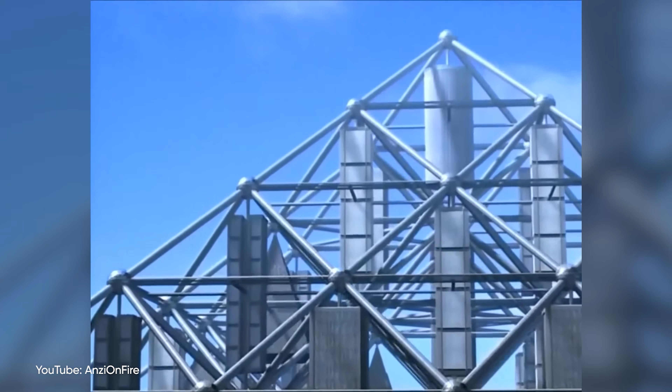A big iconic skyline is something every major city is proud of. But what if some cities take it a little bit too far and want something higher and bigger than ever before? Will it work out, and even more importantly, will there be enough money for it?

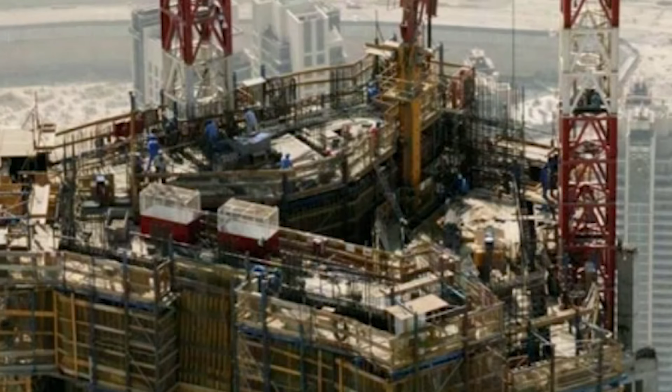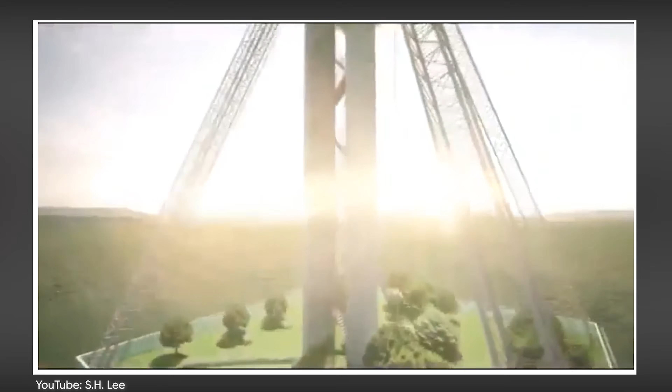Number 5: Sky City 1000, Tokyo, Japan. Since its inception in 1989 by the Takenaka Corporation, the iconic Sky City 1000 has been featured in several publications. Its popularity has grown over the last decade, and it has even been featured in various documentaries throughout the world, including a handful on the Science Discovery Channel, where I first learned about it in 2003.

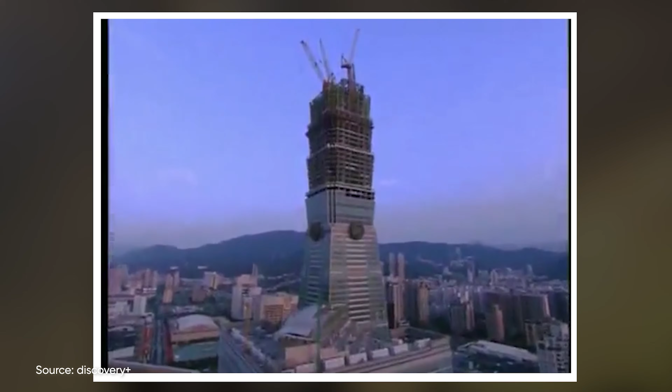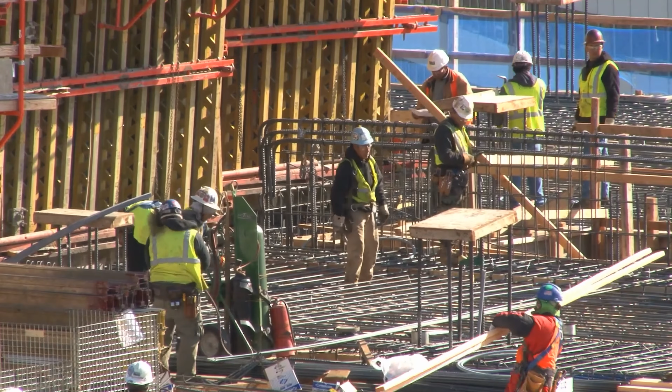Sky City 1000 was envisioned as the next step in urban evolution, with a mega skyscraper that would dwarf anything that we have now. This indicates that its huge building, which included malls, food courts, parks, and rec centers, could have housed nearly 160,000 people.

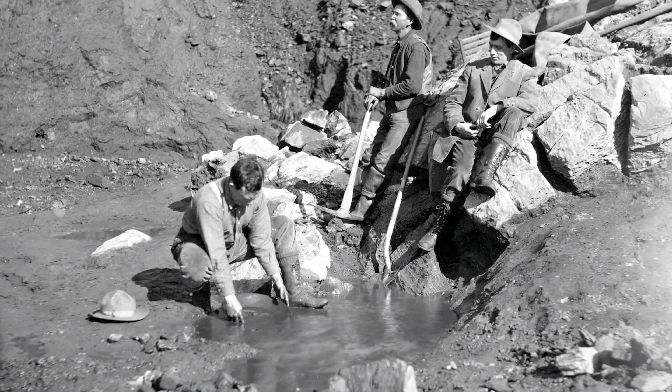Why was this initiative suggested in the first place? Sky City 1000 was conceived during a time when Japan's economy was flourishing like a gold rush, and population was exploding. The growth in population increased the scarcity of land, which meant it would become more expensive to possess. With this in mind, businesses spend a lot of money only on land, but a project like Sky City 1000 would have significantly reduced this expense.

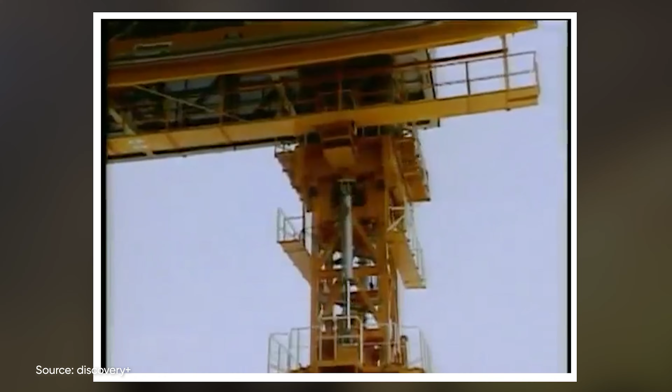Sky City 1000 would have been replicated twice more and then linked together to create something only seen in a science fiction film set in the 21st century. Now, I realize it appears silly and was most likely designed by a lunatic, but I tell you that this project was taken very seriously for a long period of time.

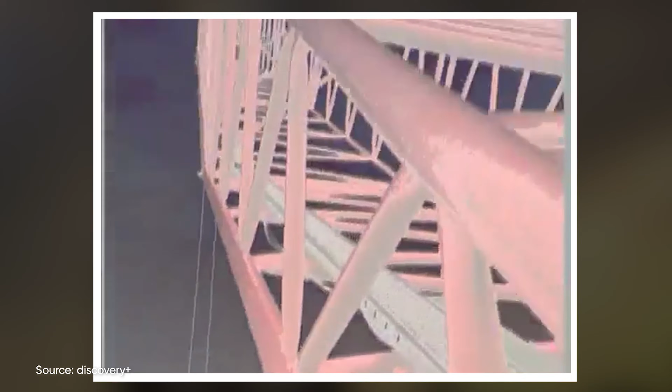However, there were numerous issues with this project. The first issue is the amount of resources required to develop it. Due to the sheer size of the monolith, it would require cutting-edge materials to keep it upright, and in order to manufacture enough materials, it would have to push smelting businesses to their limits for many decades to come, with some estimating that it may take up to 80 years to produce.

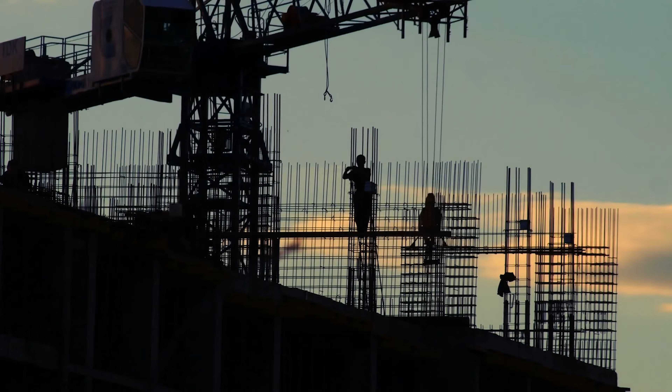The second issue is deciding where to put it. The suggested Tokyo location is required due to the scale of the building. The predicted cost is in the billions, but this is totally dependent on emerging technology and the politics around it. While Japan is currently doing well in this economy, it is hardly ideal.

Number 4: Millennium Challenge Tower, Kuwait City, Kuwait. So what if we could take whole deserts and transform them into green, fertile land?

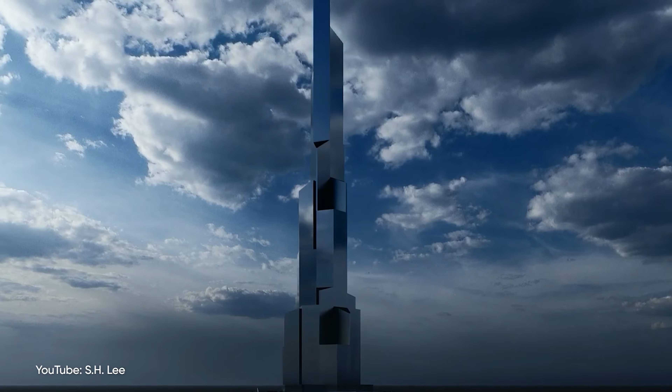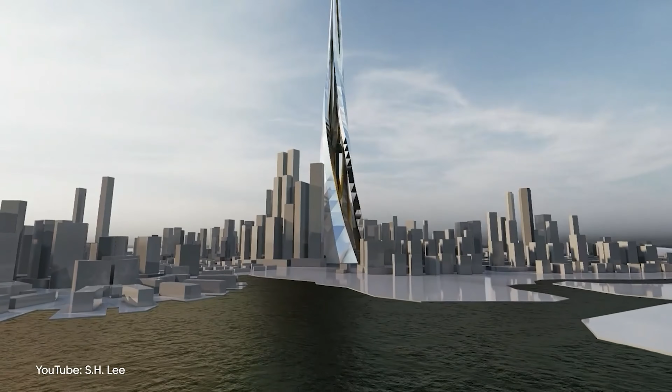Next up on our list, a vertical city in which the water used will serve to make fertile 25 square kilometers of desert, making it live by precious trees, capable in their turn to provide oxygen to the fortunate inhabitants, binding in an indissoluble and reciprocal way their destiny on this planet. A building that is not to be constructed but that grows following constructive techniques never supposed until now, capable of rising and unfolding itself section by section as a very logical flower.

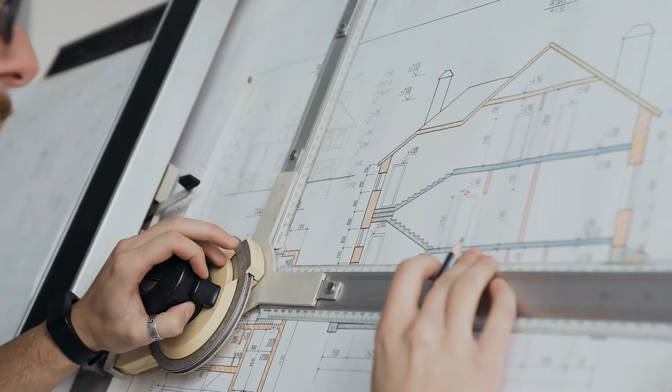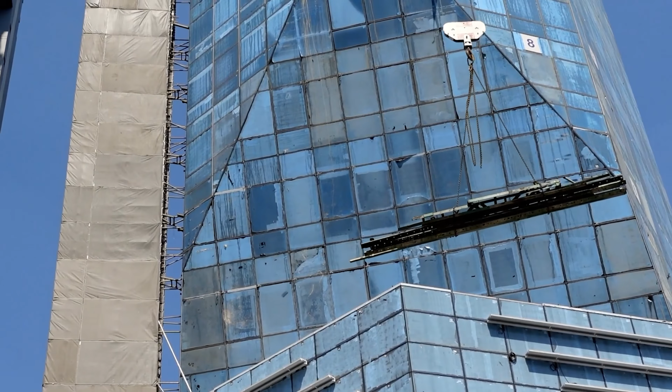Contextually, with the building project, there will be the project for the entire and sustainable maintenance, the demonstration of the updating routine of both the distributive layouts and the finishes of the installation as well as of the structural sections. And besides the demonstration that it can stand upright, the certification that it may nourish itself drawing on the sun, the wind, the rain, on its inhabitants' use, and all of that has been used in the construction may be returned in the form of reusable raw materials for future generations.

The Millennium Challenge Tower is a super tall skyscraper designed by architect Omero Marchetti as part of his proposed Ethics City concept. The aims of the project are to reach a nautical mile in height. If built, the tower would reach 6,076 feet.

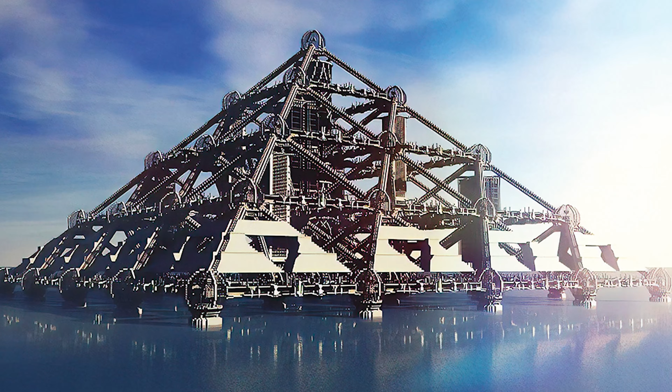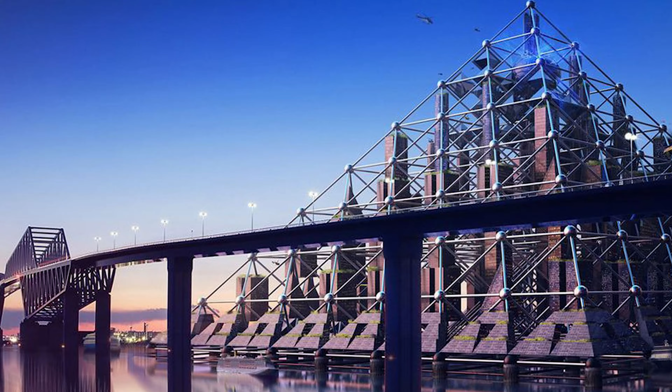Number 3: Shimizu Megacity Pyramid, Tokyo Bay, Japan. The Shimizu Try 2004 Megacity Pyramid is a proposed Shimizu Corporation project for the construction of a massive self-sustaining arcology pyramid over Tokyo Bay in Japan that would have businesses, parks, and other services all contained within the building.

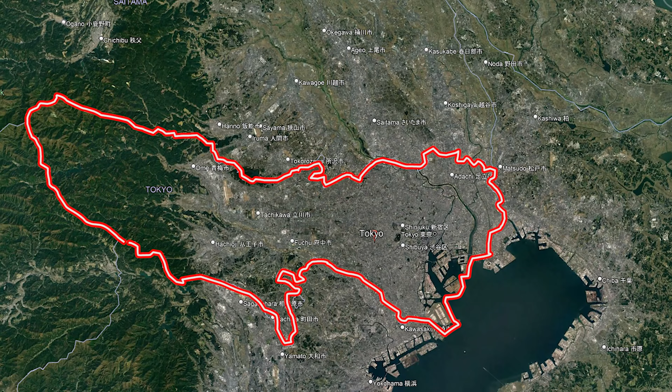The structure would house 1 million people. The structure would be 6,575 feet high, including 5 stacked trusses, each with similar dimensions to that of the Great Pyramid of Giza. This pyramid would help answer Tokyo's increasing lack of space, although the project would only handle a small fraction of the population of the greater Tokyo area. The proposed structure is so large that it could not be built with current conventional materials due to their weight.

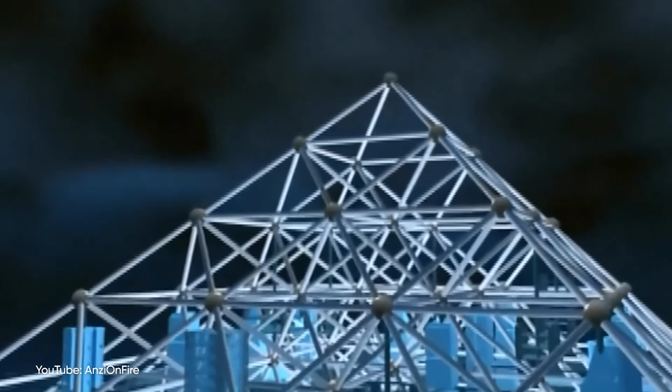The design relies on the future availability of super strong lightweight materials based on carbon nanotubes and graphene, presently being researched. The plan was to start construction in 2030, but no further action has been taken.

Shimizu is still determined to complete the project, and if built, it would make history as the largest man-made structure in world history. Tokyo has been having issues regarding overpopulation due to internal migration, among other causes.

The Shimizu Corporation, located in Tokyo since the Edo period, witnessed it firsthand. They had an idea for a solution that was different from other proposed ideas.

It started in 1982, when one of the employees went to see Blade Runner and saw the opening scene showing the two pyramids the Tyrell Corporation operated from. The architectural marvel amazed the engineer, who told his colleagues about it the following day, leading to the idea for the megacity pyramid. Ten years later, in October 1992, representatives traveled to patent offices the world over to patent their idea internationally.

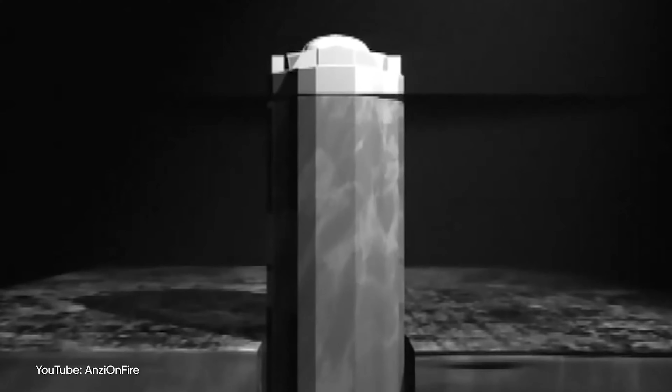The pyramid's foundation would be formed by 36 piers made of special concrete. Robotic systems are planned to play a major part in both construction and building maintenance.

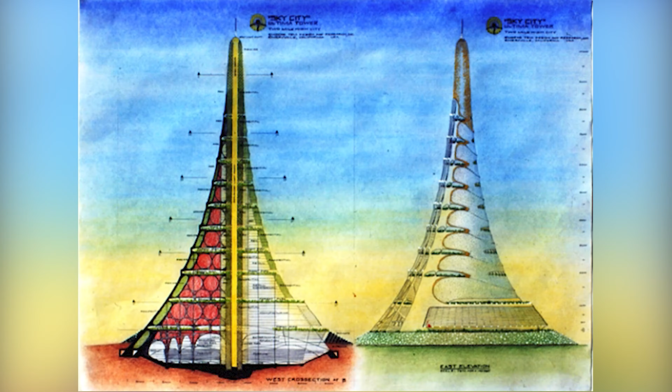Number 2, Ultima Tower, San Francisco, US. The Ultima Tower was a hypothetical super tall skyscraper designed by American architect Eugene Tsui in 1991. It was envisioned to be built in San Francisco, California, and could accommodate up to 1 million people. With a total height of 10,558 feet, the tower would be 2 miles tall and comprise 500 stories if built.

It is one of the tallest man-made structures ever conceived, but will not be built. It was never built because the idea was grossly impractical. It was proposed to be 2 miles tall.

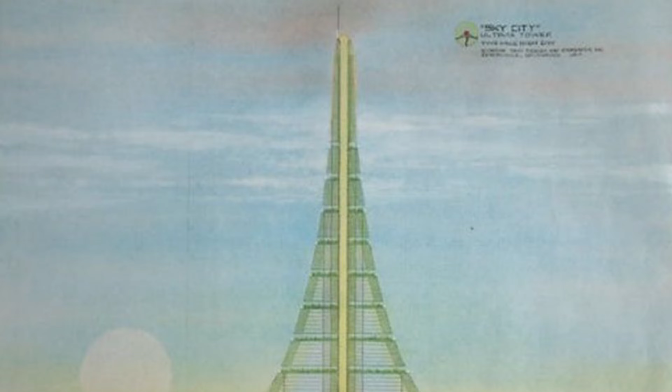The building was proposed to have over 1.5 billion square feet and be home to 1 million people, costing over 150 billion US dollars. At its base, it would have been over a mile wide.

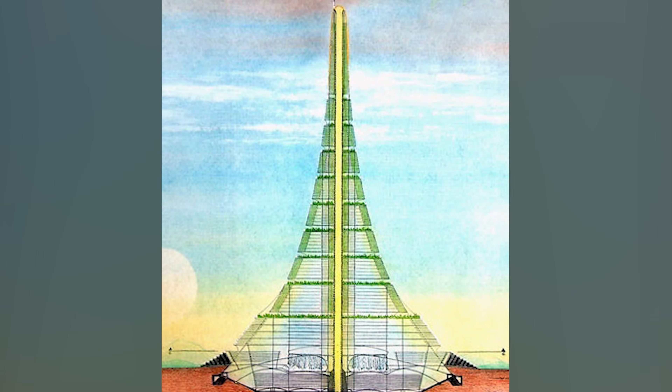Oh yes, it was going to use the difference in atmospheric pressure to magically generate enough power to run the entire thing. Unfortunately, not a single attribute of the proposed design is even realistic, not a single one.

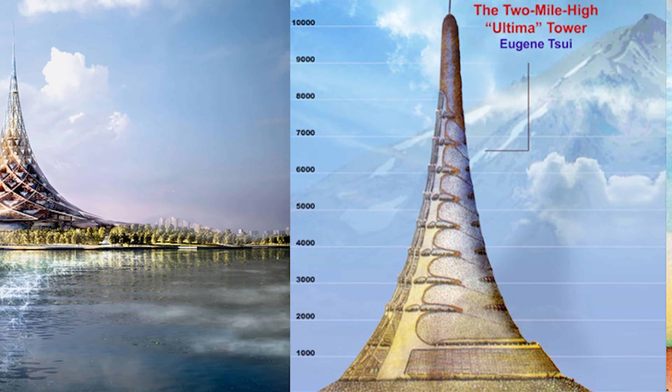For most of the floors, the vast majority of the interior space would be so far from daylight that it would be a horrible place to be. As no one has a functioning atmospheric pressure difference generator, we have to assume that this was science fiction.

The idea that we needed this design to solve the overpopulation problem is a farce. The solution to overpopulation is not to stack 1 million people in a 1 mile city block. It is to disperse people into sustainable natural villages and towns where they are not forced into huge slums in the sky.

Number 1, X-Seed 4000, Tokyo, Japan. The X-Seed 4000 was a concept, a megatall skyscraper. The idea was initially created and developed by Martin Pascoe.

It proposed a 2.5 mile height, a 3.7 mile sea base, and 800 floor capacity, and could accommodate 500,000 to 1 million inhabitants. This structure would be composed of over 3 million tons of steel.

It was designed for Tokyo, Japan by the Taisei Corporation in 1997 as a futuristic environment combining ultramodern technology with living and interaction with wildlife and nature. Methods of transportation within the X-Seed would most likely include maglev trains.

The X-Seed 4000 is never meant to be built, says George Binder, Managing Director of Buildings and Data, a firm which compiles data banks on buildings worldwide. The purpose of the plan was to earn some recognition for the firm, and it worked.

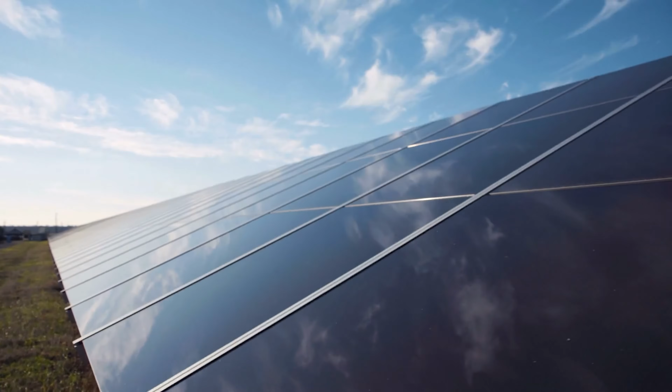Unlike conventional skyscrapers, to remain habitable the X-Seed 4000 would be forced to actively protect its occupants from considerable internal and external air pressure gradations and weather fluctuations that its massive elevation would cause. Its design calls for the use of solar power to maintain internal environmental conditions.

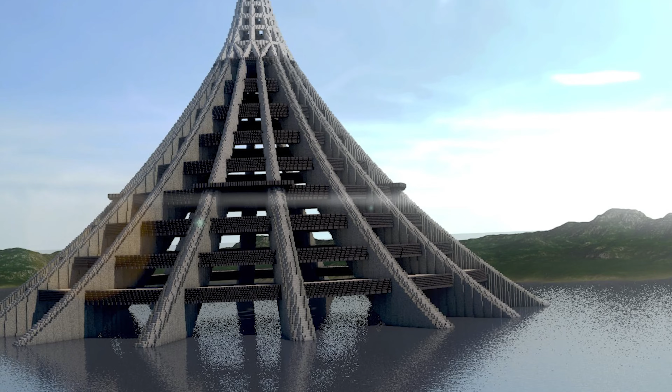As the proposed site for the structure is located in the Pacific Ring of Fire, the most active volcano range in the world, the X-Seed 4000 would be vulnerable to earthquakes and tsunamis. A sea-based location and a Mount Fuji shape are some of this building's other major design features.

The real Mount Fuji is land-based and is 12,388 feet high, making it 735 feet shorter than the X-Seed 4000. The X-Seed 4000 is projected to be twice the height of the Shimizu Megacity Pyramid at 6,575 feet.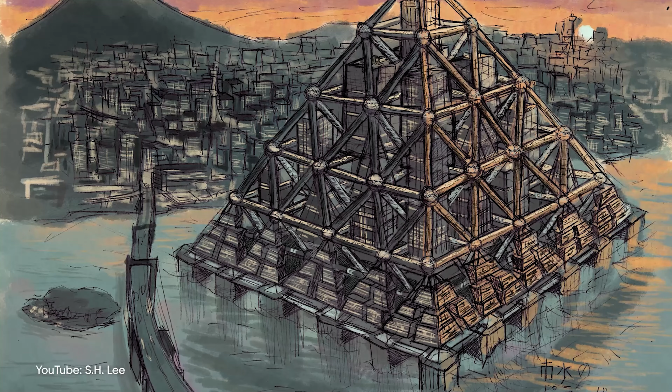The Shimizu Megacity Pyramid, proposed in 2007 and also planned for Tokyo, Japan, faces most of the same problems as the X-Seed.

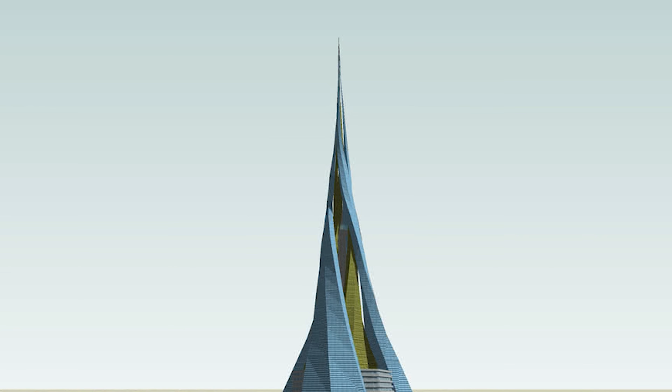Other projects that may be in the top 5 man-made structures are the Ultima Tower at 10,558 feet in San Francisco, the Dubai City Tower at 7,900 feet, and the Bionic Tower at 4,029 feet in either Hong Kong or Shanghai.